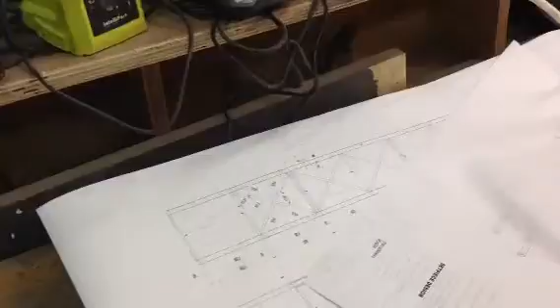etc. Okay, well this drawing, it's been brought to us in two parts. It's going to create a massive floating truss structure that two people sit on. And this is the basic drawings of how it all goes together. It's been done by someone at the Royal Shakespeare Company, and it's a proper engineer's drawing. I don't think there's ever been anything like that here. So we're all sort of like, oh, we don't really know what to do with it, because it's all very fancy. Okay. It's got all of the proper measurements on it.

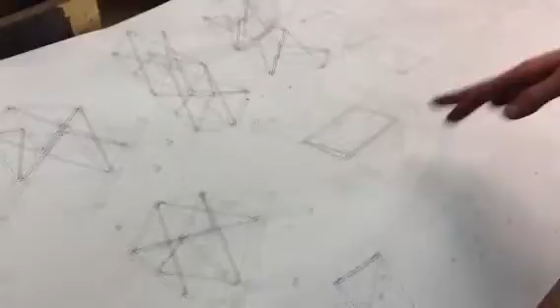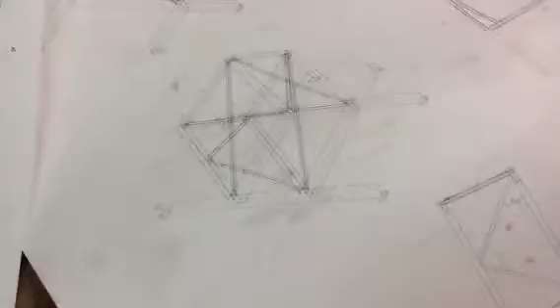So one of the things that we look for when we're assessing is, do you know the requirements? So can you interpret this drawing? I know you've just said it's quite complicated, but which bit, are you doing any of this? Not at the moment. No. We're getting a load of masking flats out where I don't think there's a drawing for them. So well, let's have a look, just something like this. What requirements would you need? Let's talk about materials first.

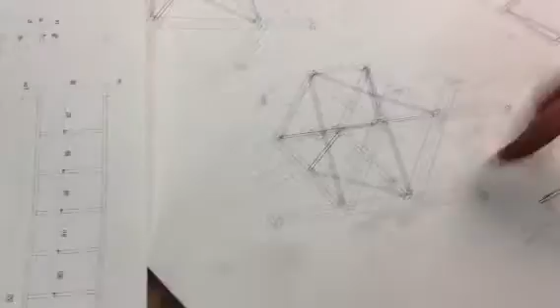Well, materials, we try to create a cutting list of every individual piece, and we do that across the whole of it, and then we total it all up. So for instance, we've got 100 by 50 by 5 gauge steel, and that's the two girders that go on the floor. And we'd go round and look at all the drawings and all of the measurements and total them all up. And once we've got that, we'd then do a costing. We'd then order it, and when that's arrived, we'd then do a cutting list, cut it all out, and then start calculating it.

Can you not order it cut? I don't think so. To my knowledge, it comes in 6.1 metre lengths. Right, okay. So everything's cut here. How about tools and things like that? With the steel, are the girders cut for you, or...? Yes, these will all be cut here. Okay. So this will all be assembled. So what tools do you need to cut? For example, we use this tool here, which is a brown box. It's our chop saw. It's our only metal saw here in the workshop. We occasionally use a pillar drill if we need to drill loads of big holes. There's occasionally little hand drills too.

What's the difference between a metal saw and a wooden saw? A metal saw, to my knowledge, uses a different blade. So that metal saw uses an abrasive disc, which just grinds away the metal rather than little teeth that cut it. Because if you put the metal into the wood saw, it would just explode and not work. I also think they're slightly more powerful. We then use angle grinders and linishers to clean up all the edges, get rid of any burrs, make it nice and smooth. Okay. And then we use the welder to join them all together. Yeah. It just uses melted metal. Okay. Great.

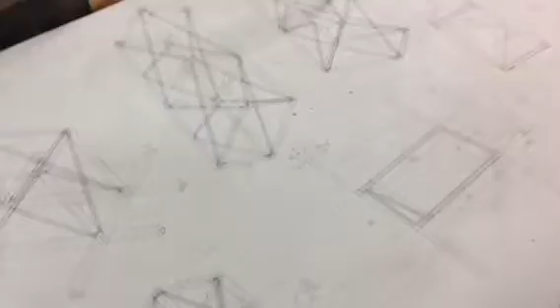So, if you were trying to schedule something like this yourself, say you were managing it, how would you split it up into different bits, or would one person work on it? How does the workshop manage the workload? Well, something like this, it's quite a big piece of set. I'd get all the metal in, and I'd assign 2 people to get it all cut in a day, and then get it all cleaned up. And once it's all been cleaned and it's all free of grease, then you start making jigs to put it all together. Something like this will probably take about 3 weeks.

I think we've got just over 1. Because the drawings have been to and fro and nothing's been agreed when it's meant to. So we're a little bit behind schedule, but there's five of us, so we should get it done. So all 5 of you on it? Yeah. What show's this for? It's for Death of a Salesman. Oh, okay. Which is starting the 13th of April. Oh, yeah, you haven't got long, have you?

Okay, alright. Just while they're doing that, talk me through some of the health and safety rules in the workshop. What sort of instructions can you see around, and what do you need to abide by? I think most of the instructions have probably fallen off the wall at some point, but on the door it says welding in progress, it says no admittance to unauthorised people. So visiting cast and company won't just come in and start playing with the tools. For example, over there, you've got signs that say no unauthorised personnel operating machine. That's because it's a wood saw, so it is very dangerous.

PPE has to be worn at all times. What PPE is that? That could be goggles, that could be ear defenders, could be a dust mask, gloves if you're handling sharp metal, and toe protectors are essential for all work. You've got other tools that all have emergency stops on, so if something does go wrong, you can emergency stop it and it will cut off the power. You've got emergency stops all around the room.

When you first started here, what were you taught on the health and safety side of things? Yes, I was taught how to use the machine, how not to use the machine. So you then adapt what you need to do around what you use it for. And if there was a health and safety issue, like something trailing along the floor, and it was something you couldn't deal with, do you know who you'd have to speak to? Who is your health and safety person? If it was a problem in the workshop, I'd speak to one of the full-time members of workshop staff, like the head or the deputy manager.